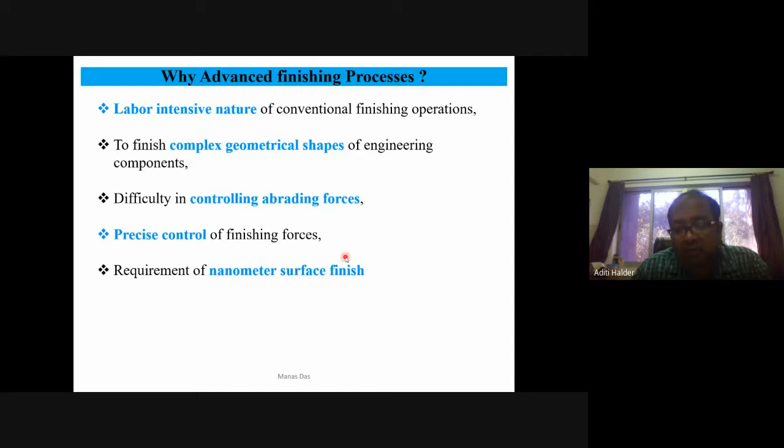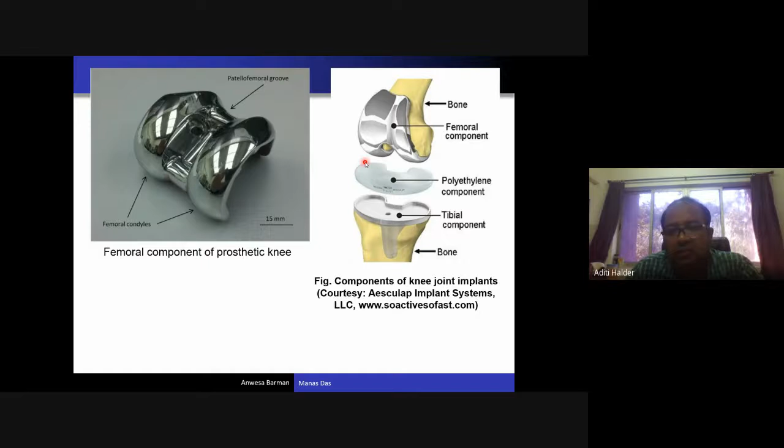This viscoelastic polymeric media is mixed with these abrasive particles. Extrude Hone is the company in USA who manufactures this viscoelastic polymeric media. The beauty of this media is that if you hold it in your hand, immediately it takes the shape of your hand. This means this media can make a compliant lap of the surface where you need the polishing.

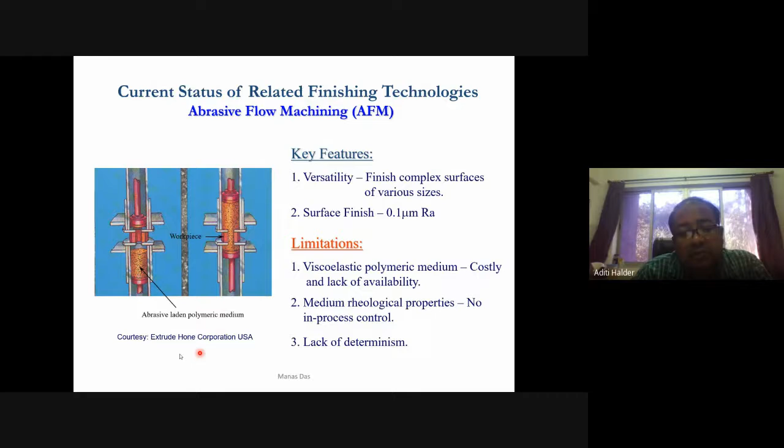Another process is called magnetorheological finishing, developed by the Center for Optics Manufacturing in Rochester, USA. They developed this magnetorheological finishing process and have been working on it for 20-30 years.

Now commercial machines are available, from a company called QED Technologies, to which they transferred their technology. They have different machines available, mostly used for polishing lenses and mirrors - high precision lenses and mirrors made of glass, quartz, and other brittle materials.

So this is the only process. Magnetorheological finishing is the only process for finishing this kind of brittle material.

Our defense industries, such as DRDO, are also trying to purchase this magnetorheological finishing experimental setup from them. But since it is used for defense purposes, like lenses used in missiles, they are not selling to us. So not a single machine is available in India.

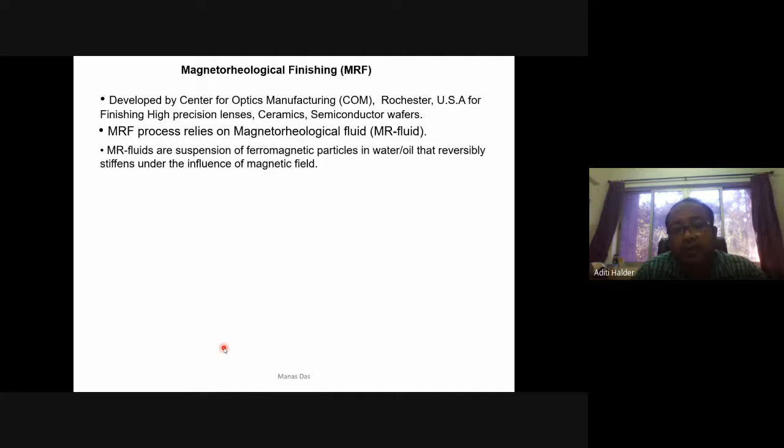It works on the basis of a magnetorheological polishing fluid. This MR fluid contains ferromagnetic particles, called carbonyl iron particles. It consists of these kinds of ferromagnetic particles, called carbonyl iron particles.

To make this a polishing media, you mix in abrasive particles - these may be silicon carbide, boron carbide, or diamond, depending on what kind of material you are using. So you can choose your abrasive particles depending on the hardness of the workpiece material - higher hardness requires harder abrasive particles. Alumina and silicon carbide are the lowest, then boron carbide, and diamond abrasive is the highest available ceramic abrasive particle.

These ferromagnetic iron particles are actually 99.99% pure soft iron particles. These iron particles do not take part in the material removal - only the abrasive particles mixed with these iron particles take part in the material removal.

Now for preparing this MR polishing fluid, there should be a base media - meaning you have to mix these abrasive particles and iron particles into a base media. When polishing lenses and mirrors made of glass and quartz, you can use a water-based media.

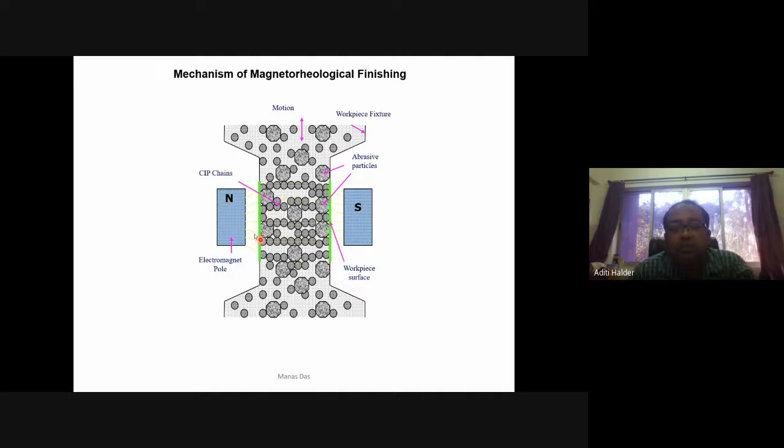So in this zone, the fluid behaves like a Newtonian or non-Newtonian fluid. When it exits the finishing zone, it behaves like a Newtonian fluid. So in this zone and in this zone it behaves like a Newtonian fluid, and in this zone it behaves like a non-Newtonian fluid.

Is there any questions? Okay. So he's...

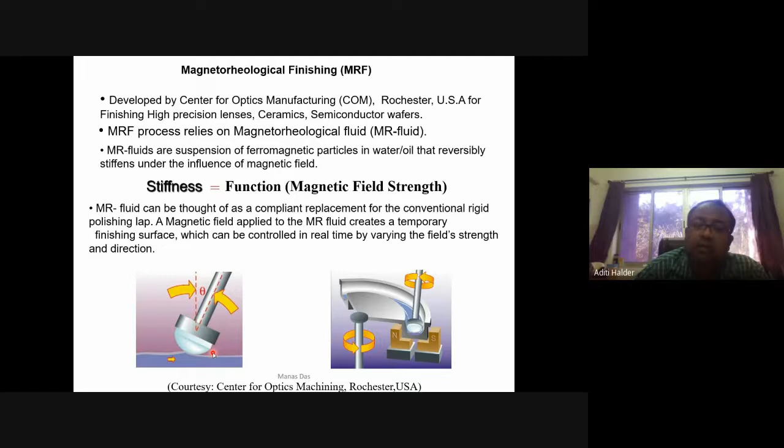So there is another design, and that is actually the final design. It consists of a disc. You can see this one - there is a part of a sphere. The top surface of this disc is a part of a sphere here.

From there it comes to the MR fluid conditioner. In this conditioner, the viscosity, yield stress, and temperature of the fluid are maintained. If it changes, the constituents in the fluid are immediately replenished, and the fluid maintains the same viscosity and yield stress, so that we get the same fluid for polishing of a single workpiece.

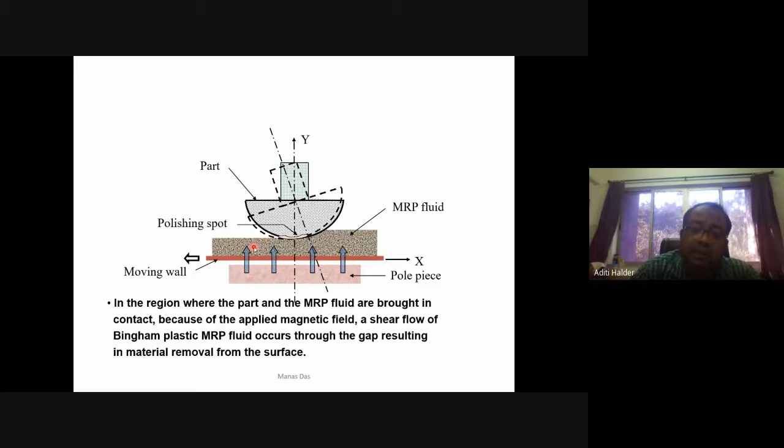So actually there is a shearing action of this MR polishing fluid over the surface of the workpiece. The magnetic field, you can see here, is perpendicular to the fluid, and the MR fluid is moving from right to left direction.

Now, this magnetorheological finishing process is the main process for polishing glasses and lenses, and it is mostly used in defense industries. But it is limited to flat, convex, and concave surfaces, and only for external surfaces. For polishing internal surfaces or complex freeform surfaces, it is very difficult. Although in this process you can get angstrom level surface finish, which is very rare in other processes.

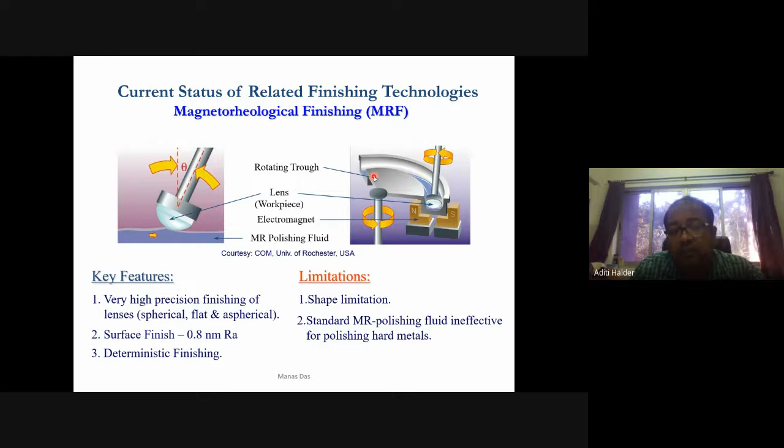So here they are using smart polishing fluid, smart polishing media, which can be utilized in the AFM process. In abrasive flow finishing, the problem is that the rheological property of the media cannot be changed externally, but the rheological property of this MR polishing media can be changed externally. So we can use this MR polishing fluid in the AFM setup and develop a new process called magnetorheological abrasive flow finishing process, or MRAFF. It uses MR polishing fluid in an abrasive flow finishing experimental setup, so it's a combination of the MRF process and the AFM process.

So this is the experimental setup of the MRAFF process. But before that, one prototype machine we have developed.

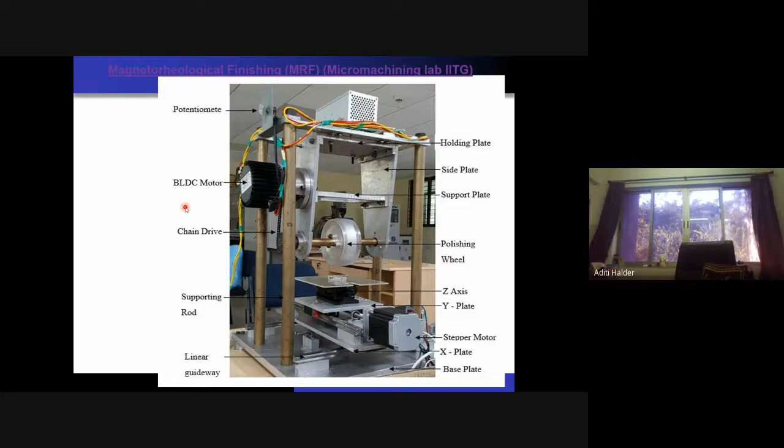So one prototype setup we have developed in our lab. Here, two stepper motors are used for the XY movement of this table, and one manual lab jack is used for the Z-axis movement. This is the workpiece fixture where we fix flat workpieces, and this is the MR polishing tool basically. The disc I showed earlier, we tried to make here using Perspex material. Here, instead of an electromagnet, we are using a permanent magnet, because the electromagnet needed to generate 0.5 Tesla magnetic field, with the coil, becomes very heavy, since we could not find a very good core material.

Now we know what they use actually: pure iron, meaning very low percentage of carbon, for this kind of high permeability core material. But at that time we could not find that, so that's why we used a permanent magnet here. The permanent magnet serves a similar purpose, but here we cannot change the magnetic field. So what we did was use NdFeB, neodymium iron boron.

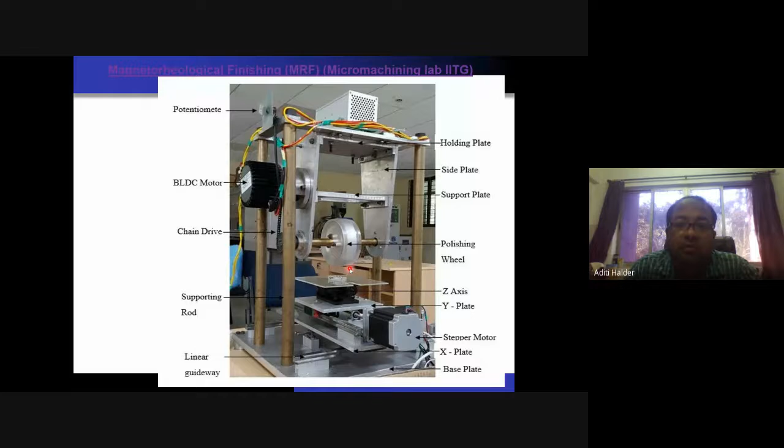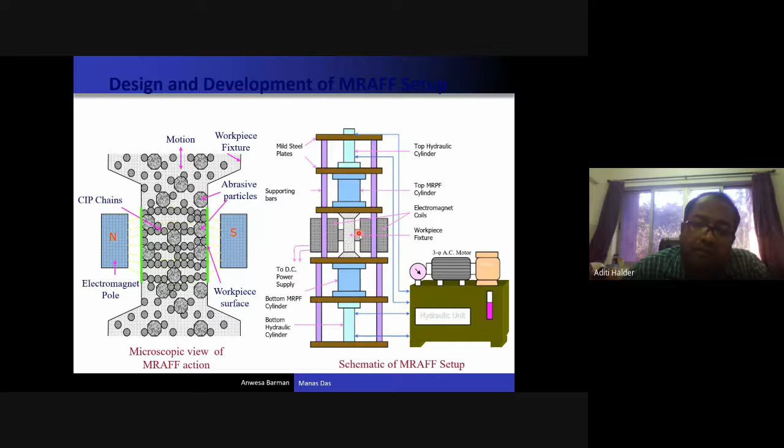So like that we can develop this kind of custom made setup. We have also developed this experimental setup, this custom made experimental setup, in our lab.

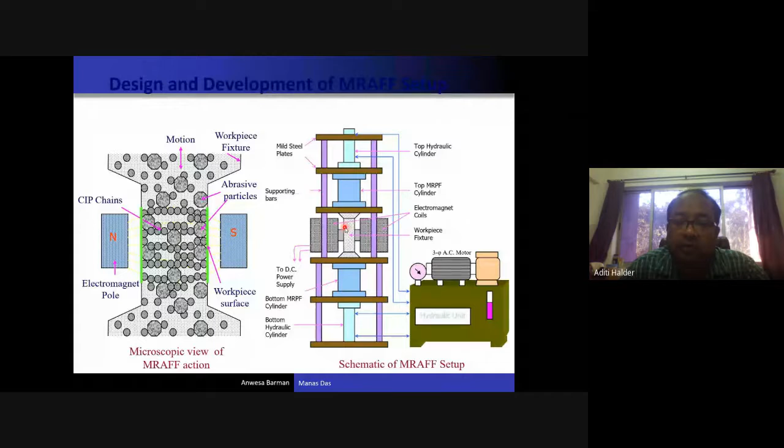With material and everything, I gave 1 lakh rupees for this setup. I shall show later that our experimental setup, how we have developed it. Okay, so this is the setup.

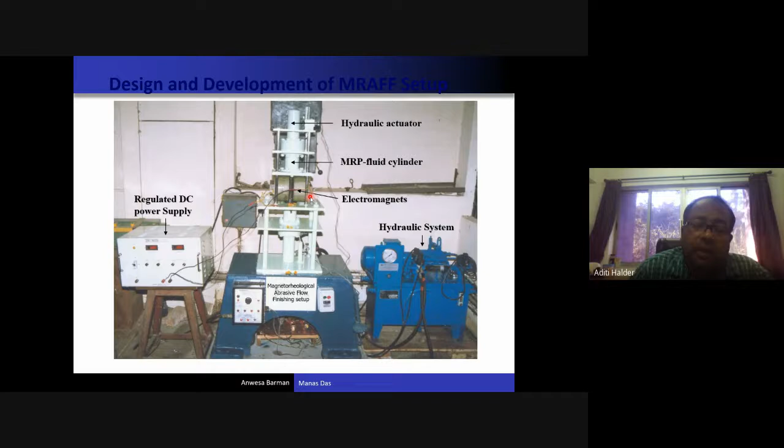So later we found that low carbon steel, any kind of low carbon steel, will perform best for this kind of setup.

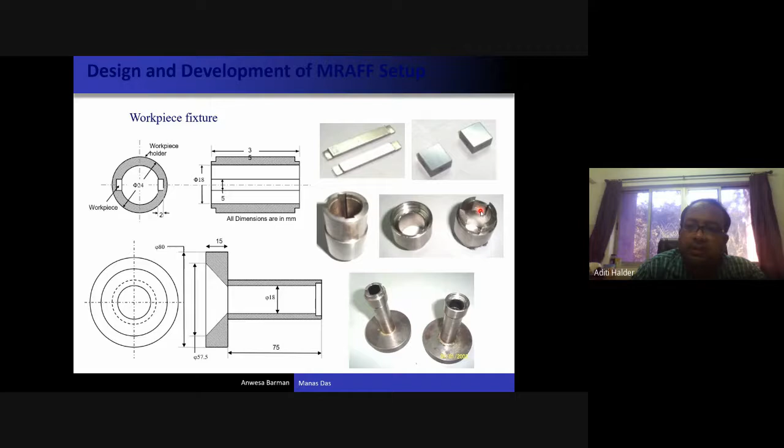Sorry for the interruption, just 2 minutes from there.

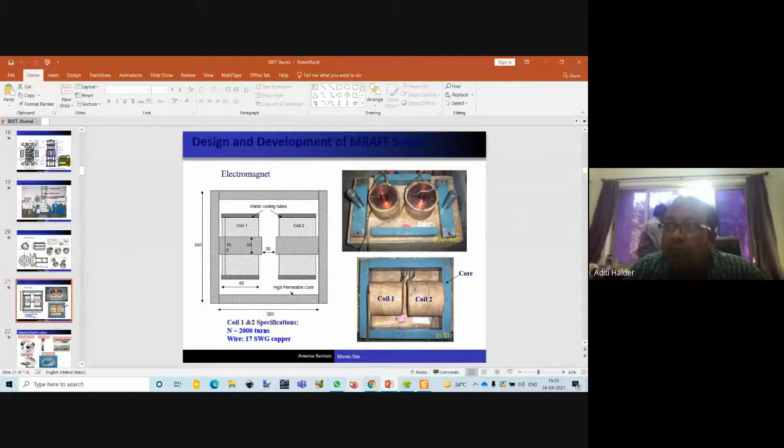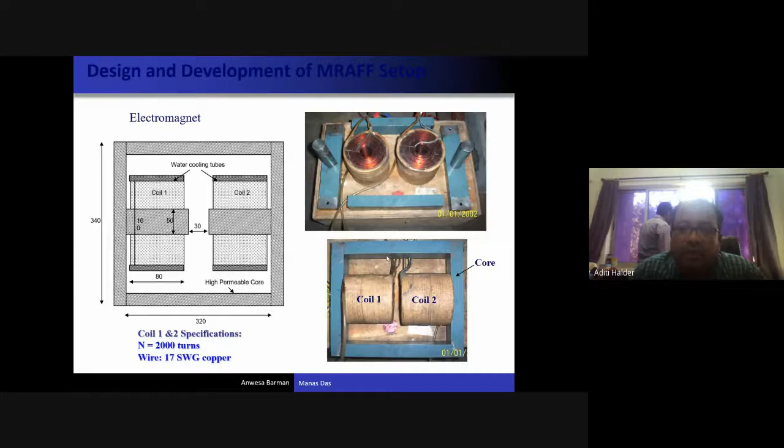Yes sir, actually this is the electromagnet what we are using here. There is a core material, and this is the coil. It is called an S-type electromagnet. So instead of using this cold roll anneal steel, you can use low carbon steel.

And this coil, you can see outside there is a cooling channel, which is a copper channel. Chilled water is flowing over the copper coil so that whatever heat is generated can be removed. So this electromagnet you can use for 1 to 1.5 hours, so it can work perfectly without any damage to the insulation of the copper wire.

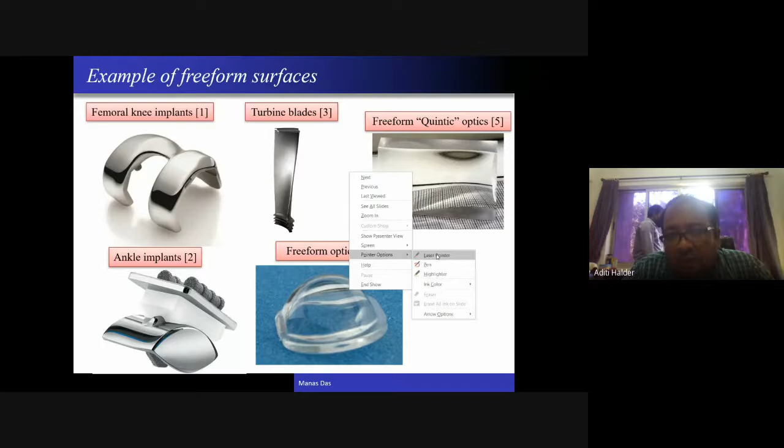Now these are the different components which can be polished by this MRAFF process. First one is femoral knee implant, second one is turbine blades, and third one is the freeform optics. Now ankle implants, freeform optics - these are the different components which can be polished by magnetorheological finishing very, very efficiently.

So we are doing here in our lab - this femoral knee implant actually already polished. Some miniature gears already we have polished. Turbine blades we did not try, and some other components, space related components, we have tried here in our lab.

So this MR fluid, if you want to generate indigenously, there are three phases. One is the continuous phase, which is the base material, second is the magnetic disperse phase, and third one is the abrasive particles.

This continuous phase, as already I have told, consists of water based or oil based media. Now this base media is mixed with these ferromagnetic iron particles, which are in the micron size. Its size depends on your actual requirement. If you need higher magnetic field, you have to use bigger size iron particles.

So these iron particles, mostly we are using carbonyl iron particles, Fe(CO)5. These carbonyl iron particles are supplied to us by BASF. BASF is a company in Germany, a very famous chemical company. They prepare these carbonyl iron particles and gave them to us free of cost.

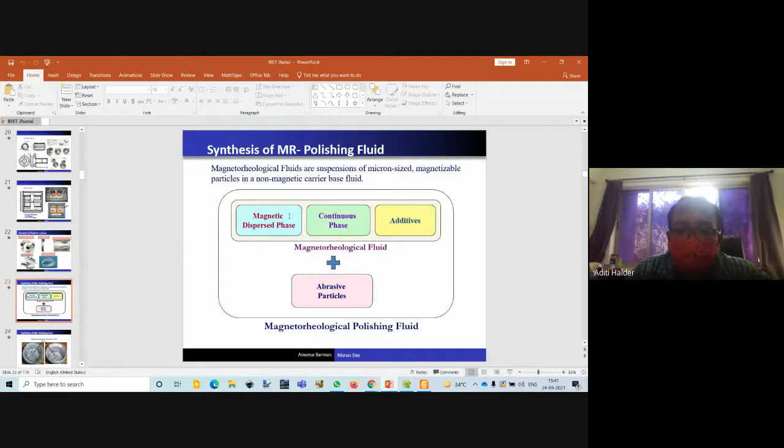So that's why some kinds of additives are actually used. These additives are like oleic acid or glycerol. These additives are called surfactants. When you mix these surfactants along with the base media, they make a small layer over the surface of these magnetic particles. Because of this small layer generated over the entire surface of the iron particles, these magnetic particles cannot come close together, so you can reduce or avoid the agglomeration problem.

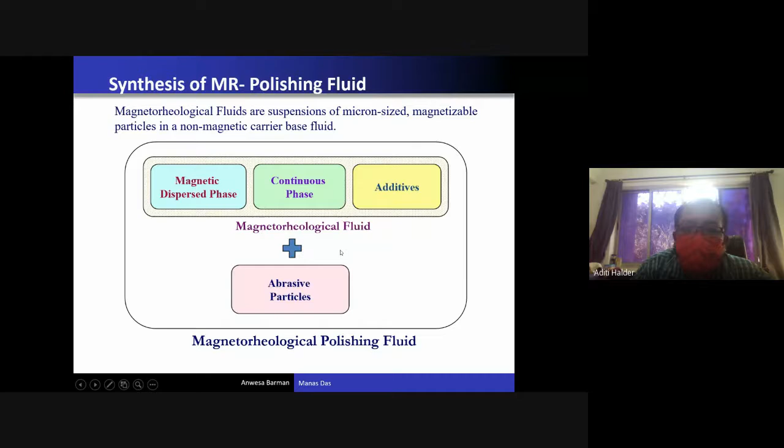But if you use more volume percent of these additives, because of this bigger layer or higher thickness of surfactants, the magnetic field will be reduced, so they will be less magnetized. Now, after mixing all these things, if you mix these abrasive particles, this MR fluid will become magnetorheological polishing fluid.

So now coming to this media, you can see this kind of thick media which is generated when you are using MR polishing fluid. Now, other than these carbonyl iron particles, other options of ferromagnetic particles are manganese zinc ferrite and nickel zinc ferrite. So these are the other options.

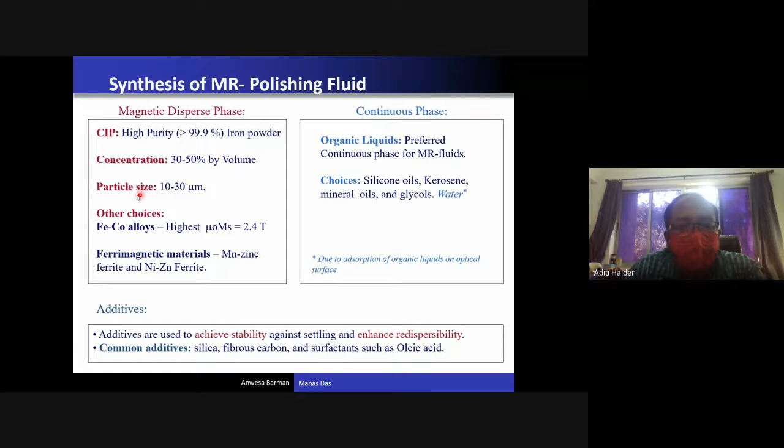So this CIP has a unique property. It is 99.9% pure, and mostly it is 30 to 50% by volume used inside MR polishing media, and their size is 10 to 30 micron in range. Okay, and then they have, you can see here, hysteresis loop.

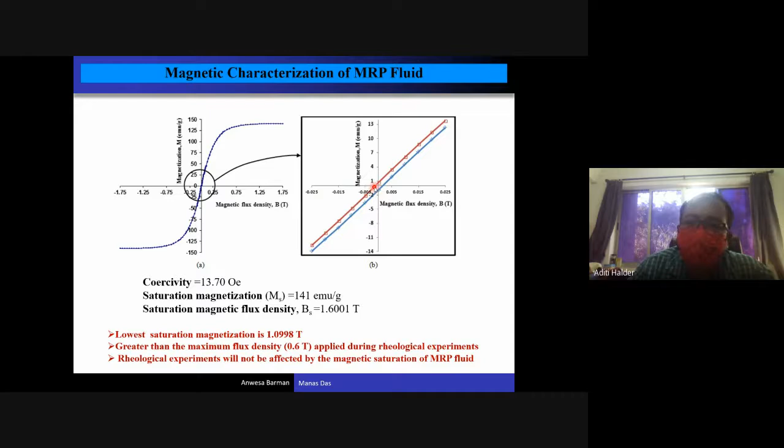So in case of this MR fluid, what you have to do: around 2 to 4 to 5 ml of this MR fluid you have to keep inside a small plastic chamber, and then you have to magnetize it. And then you can see this remnant magnetization is less. This means when remnant magnetization is less, if you demagnetize, then immediately these iron particles also demagnetize, so less amount of magnetization will be there, and agglomeration can be avoided.

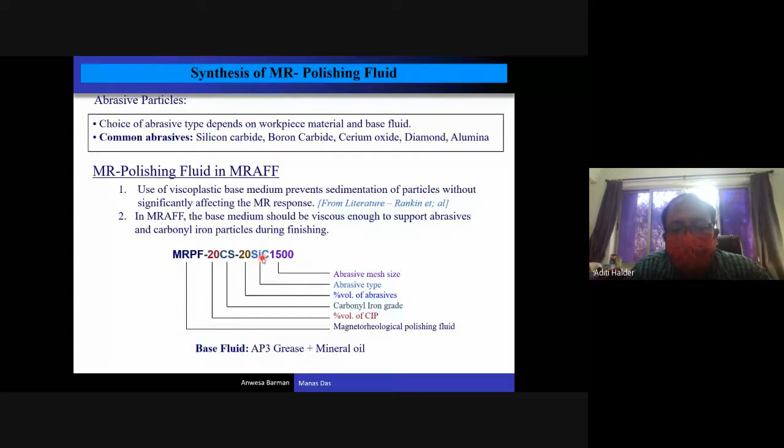So this normal MR fluid, this magnetorheological polishing fluid, is 20% by volume of CS grade CIP iron particles, and 20% by volume silicon carbide abrasive particles of 1500 mesh size. So this kind of nomenclature we have used. This one we shall discuss later.

Now this MR fluid, we have to consider rheological properties, because if you consider a Newtonian fluid, the shear stress and shear rate plot will be a straight line starting from the origin of the curve. For non-Newtonian fluid, there is a yield stress. So non-Newtonian fluid like MR fluid has a yield stress and a plastic viscosity; this means it does not start from the origin.

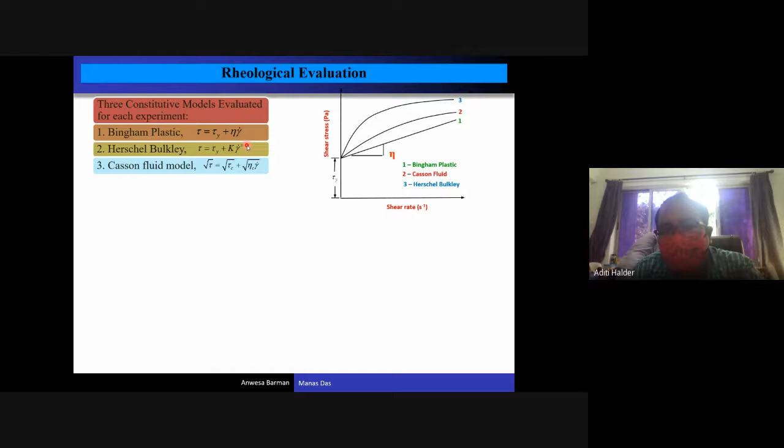Now another fluid which can also represent this MR fluid is called the Herschel-Bulkley fluid: tau equal to tau y, the yield stress, plus consistency index K times shear rate to the power n, the power law index. So this n value, if it is 1, then it becomes Bingham plastic. If n value is greater than 1, it is shear thickening. If n value is less than 1, it becomes shear thinning fluid. So these are the three different fluids.

So now for measuring the yield stress and viscosity, there is a capillary rheometer. Through this capillary, the MR fluid is forced to flow. This capillary diameter is around 2 millimeter diameter.

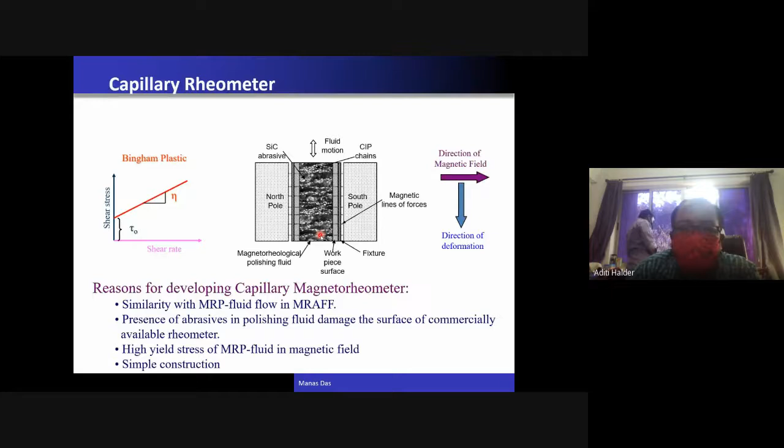The L by D ratio, where L is the length of the capillary and D is the diameter, should be more than 40.

The tau y is the actual yield stress. So yield stress and plastic viscosity, which are unknown, can be measured from the capillary rheometer experiment. At different pressures we have to measure the volumetric flow rate, and from there, if you plot it, you can get the values of tau y and eta PL.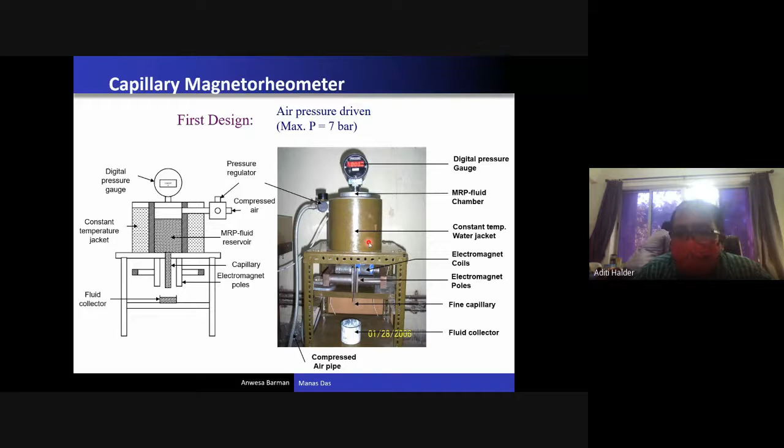So what we did initially: this is the capillary rheometer here, and this is the core material of the electromagnet. Through compressed air, the MR fluid was made to flow, but it did not work.

Then what we did was use the MR polishing media or MRAFF experimental setup itself for this capillary rheometer. This is the top media cylinder which is filled with MR fluid. At the bottom there is a capillary attached, and through the electromagnet, magnetic field is applied, and the piston forces the media to flow through this capillary.

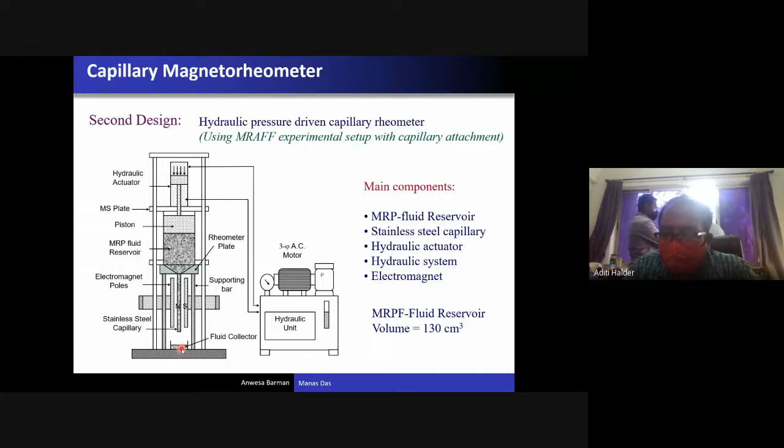At the bottom we placed a container, which collects the MR fluid once steady state is reached. This container collects the MR fluid when the steady state is reached, and from there we can calculate the volumetric flow rate.

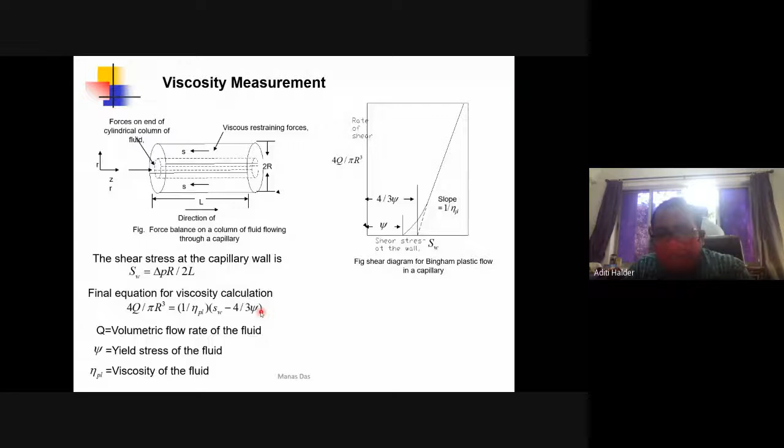Putting all these values into the equation, you can calculate the values of the plastic viscosity and the yield stress, shown over there in this graph.

Later, we got one more rheometer, the Anton Paar MCR 301 rheometer. It has an MRD device, a magnetorheological device. In this rheometer you can see there is a tool master attached to it.

In the bottom plate there are two plates. The top plate is the tool master, and the bottom plate is the MRD device, which is a sandblasted measuring plate. This is called a parallel plate rheometer, with the top plate and bottom plate.

In between these two plates, MR fluid is kept. This has a 20 millimeter diameter and 1 millimeter thickness. This is the MRD device, magnetorheological device, where the electromagnet is located.

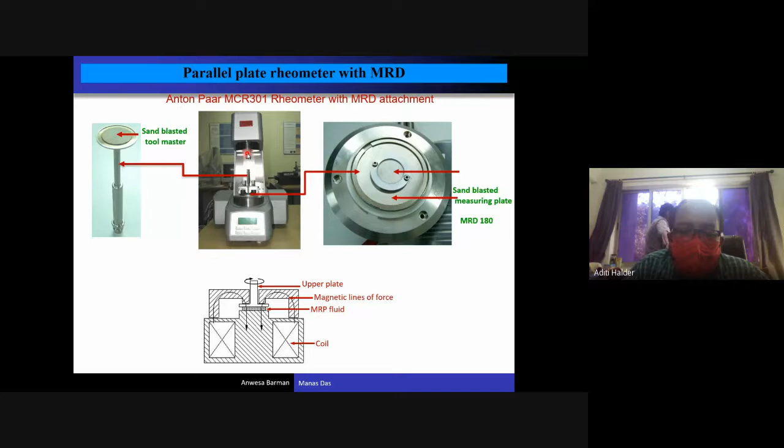Using this MRD device, magnetic field is applied perpendicular to the MR fluid. The tool master, which is attached here, rotates at a certain RPM, and this RPM is proportional to the shear rate.

When you apply magnetic field, there is a resisting torque that can be measured by the tool master itself, and this resisting torque is proportional to the shear stress.

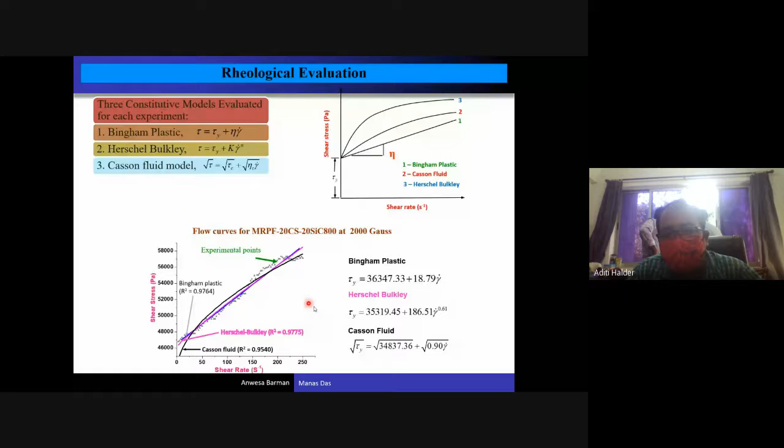If you plot the shear stress and shear rate values at different shear rates, you get different points, which you can fit using different curves. There are three different curves we used: Bingham plastic, Herschel-Bulkley, and Casson. Using these three equations, we calculated the yield stress and viscosity of this fluid. So this is how you can measure it.

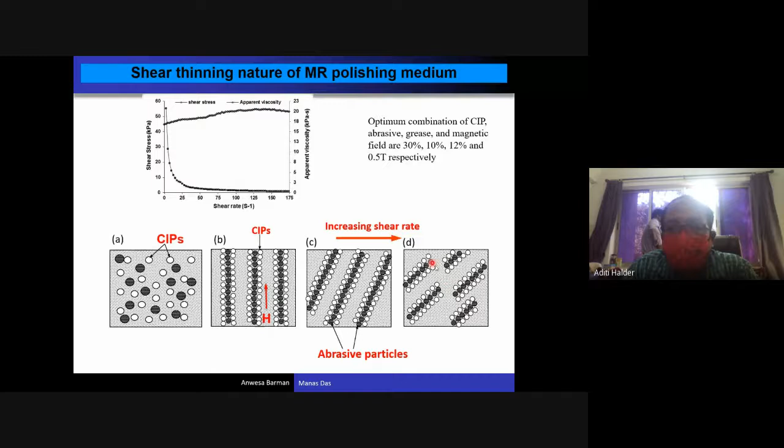Now when you apply a certain amount of shear rate, this chain structure actually breaks. When you use a higher shear rate, the chains initially bend, but after that they break and do not get time to realign again. So permanently there is chain structure breakage, and only then will the MR fluid flow. That's why this MR fluid is called a shear thinning fluid.

We can do lots of experiments with this MRAFF process. The external parameters you can change from outside are the extrusion pressure from the hydraulic unit, finishing cycle, and magnetic field. The same MR fluid can be used for polishing different kinds of workpieces - you don't need to change the MR fluid. What you do is change the magnetic field only.

By changing the magnetic field - by changing the current to the electromagnet - more magnetic field can be generated over there. So these are the different parameters for the fluid: abrasive concentration, abrasive mesh size, CIP concentration, and volume concentration. These are the different parameters you can vary.

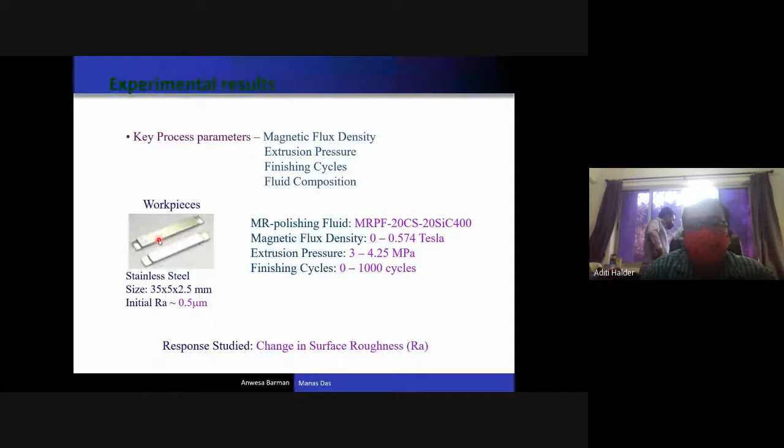Now experiments can be conducted on this kind of stainless steel workpieces. At different magnetic fields we have done the experiment. This is the initial surface roughness of the workpiece, and this is the final surface roughness at different magnetic fields. At zero magnetic field there is no finishing, because the CIP particles of the MR fluid cannot take part in metal removal.

I shall show here that when you apply zero magnetic field, these abrasive particles are not bonded by the iron particles. So whenever these abrasive particles come in front of a roughness peak, they rotate over the roughness peaks without cutting.

Now at higher magnetic field, these CIP particles are bonded together, so abrasive particles are held in between this strong bonding force of the CIP particles. Whenever they come in front of the roughness peaks, they remove the surface peaks from the workpiece surface, and small amounts of chips are generated.

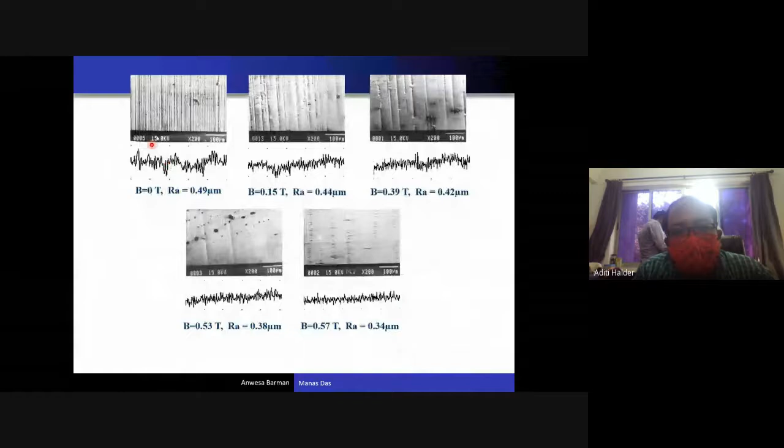With increasing magnetic field, the change in surface roughness also increases. Initially this is the grinded workpiece, and these lines are actually peak lines or valleys. Initially the distance between two valleys is more, and this distance increases further in case of a higher magnetic field.

We have also done experiments with extrusion pressure. One thing I want to mention here is that in this MR fluid there are two zones: one is the plug flow region and another is the shear flow region, or yielded region. In both regions - in the plug flow region, this MR fluid does not yield.

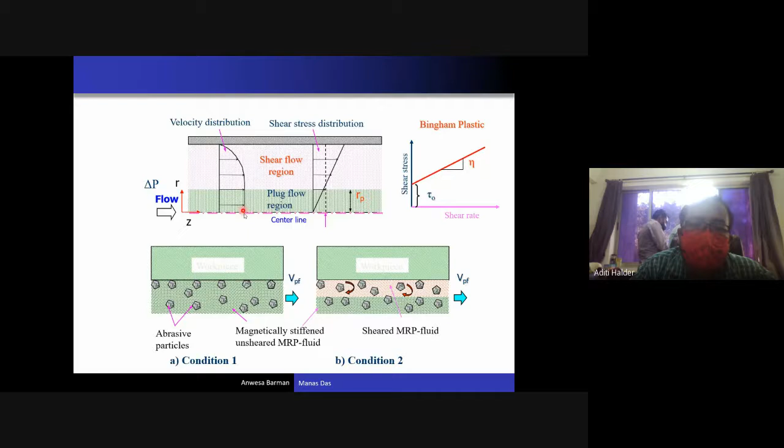In the shear flow region, the chain structure of the MR fluid actually breaks. If you see a normal Newtonian fluid, the flow profile is parabolic. But when using this kind of non-Newtonian fluid, there are two zones. In the plug flow region, the velocity gradient with respect to the radial direction, del Vz del R, is zero here. In this case, the fluid chain structure does not break, as the shear stress is maximum at the wall and minimum at the center line.

As the shear stress is maximum at the wall and minimum at the center line, the chain structure breaks at the wall itself. That's why this kind of profile is generated when simulating this MR polishing fluid. Now, with finishing cycle also, a number of experiments are done.

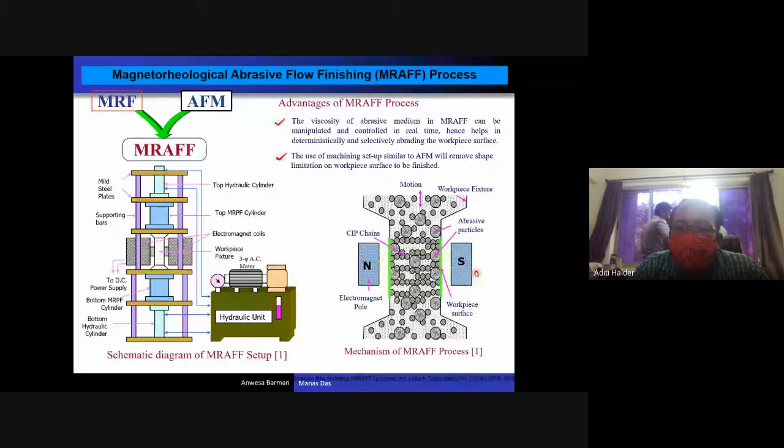After that, we found that in front of the two poles where the magnetic field is maximum, if you are polishing the cylinder, the surface finish is more. But at the zone perpendicular to that, where the magnetic field is lesser, you will see non-uniform finishing over the surface of the workpiece. So we thought, if we can rotate this magnetic field around the cylinder, there may be chances of getting better finishing.

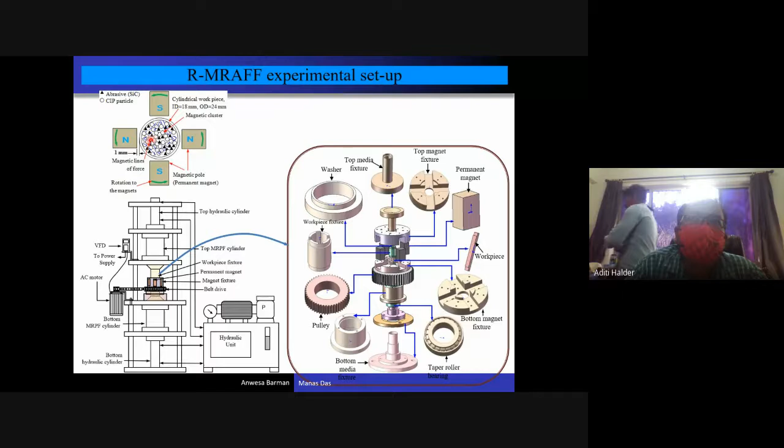So that's why we did this. This is the cylinder where we want to polish the internal surface. Now these permanent magnets are kept in a magnet fixture, attached there. This magnet fixture is rotated at a certain RPM. If it rotates, the MR particles inside the cylinder also rotate, and as the abrasive particles are mixed, it removes the surface undulations on the workpiece surface.

It is rotated by an AC motor, as you can see here. This is the exploded view of the finishing zone, workpiece fixture, and magnet fixture. Many components are here: these NdFeB permanent magnets which are attached, this is the workpiece, cylindrical workpiece. The magnet fixture is attached to a pulley, placed over it, and this pulley is rotated using a belt drive. So using the AC motor and this belt drive, the total fixture is rotated.

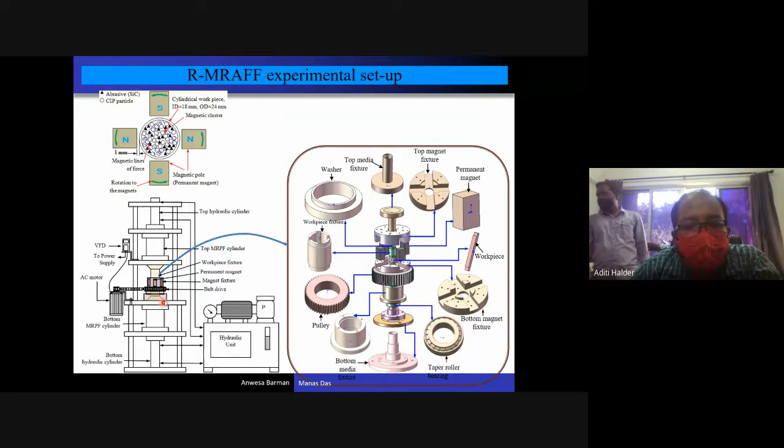There is a variable frequency drive, using which I can change the RPM of this magnet. Using this hydraulic unit, we can give a reciprocating motion to this media, and using the circular motion of this fixture, we can also rotate this media. So we can give two types of motion: reciprocating motion and also circulating motion. That's how it works.

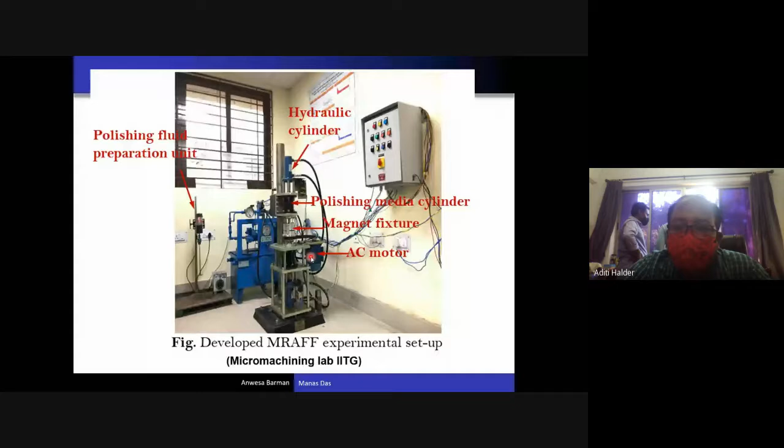This is the experimental setup we have developed in our lab, where we have tried to automate the total process. You can see the AC motor here, the magnet fixture here, the belt drive here, and the hydraulic unit over here. This is the control unit of the hydraulic unit, controller of the hydraulic unit, and this is the stirrer.

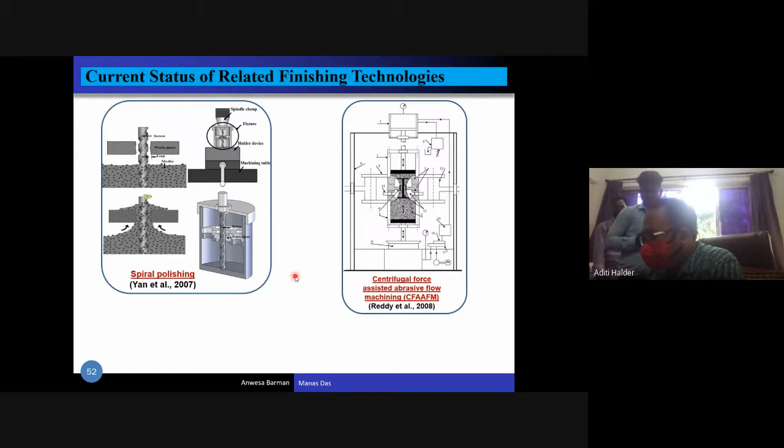Using this, we mix our MR polishing fluid over here.

Okay, sorry for the interruption. No problem, sir.

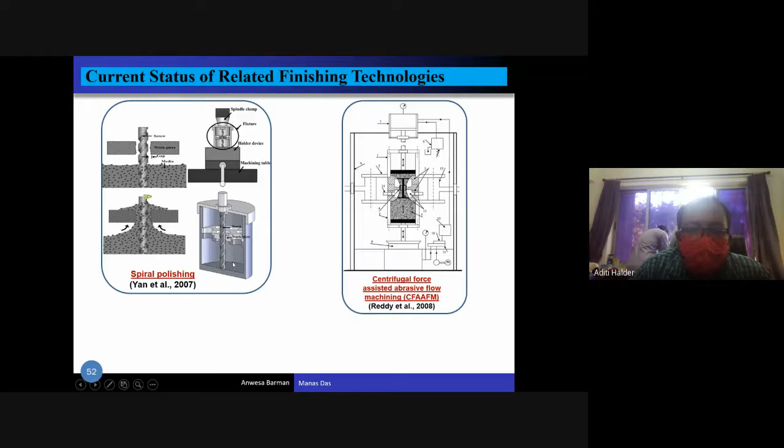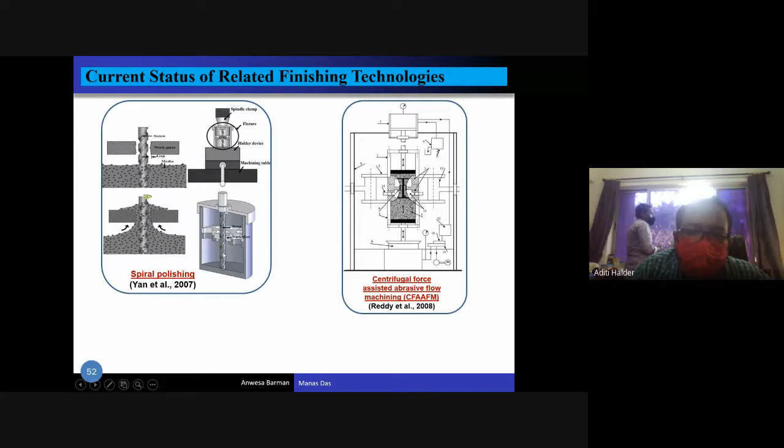Other than this complicated process, you can use a drill bit in a drilling machine. You can make this kind of chamber, and from the bottom chamber you can fill up polymeric media or MR fluid, and then rotate this drill bit, a twist drill. When you move the media from here to here, you rotate clockwise, and when moving it from top to bottom, you rotate anti-clockwise. So you have to design the drill bit rotation so that sometimes it rotates clockwise and sometimes anti-clockwise.

While moving this media, in between the drill bit and the workpiece as it passes, the abrasive particles will remove the surface undulations. Other than this, there is also a centrifugal rod setup, developed at IIT Roorkee, where a centrifugal rod is rotated inside the workpiece fixture. Because of this rod's rotation, the MR fluid and AFM media also rotate, removing the surface undulations. Another setup is there, developed at IIT Madras.

This is the workpiece holder. On this workpiece holder, different small flat workpieces are fixed. It is filled with MR fluid, and there is a spring loaded shaft there.

Using the spring loaded shaft, what they do is this MR fluid is moving top and bottom, and outside they have applied this magnetic field, and also this workpiece shaft rotates inside this fluid.

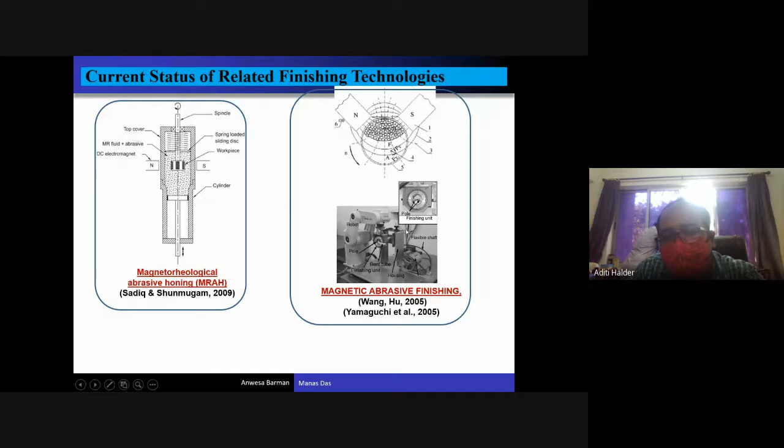Now another setup is there. There is a robotic arm which moves over the bent tube, so any kind of bent tube can be polished. Here they are using the magnetic abrasive finishing process.

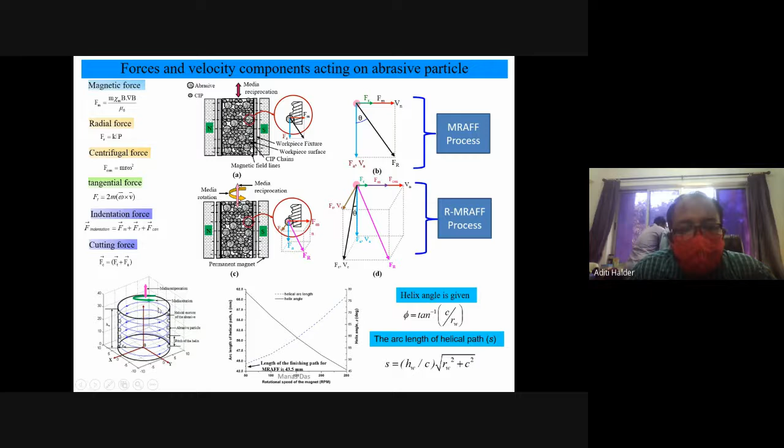Because of this rotational speed of the MR fluid, a centrifugal force will be added. Besides the magnetic force and radial force, one centrifugal force and also one Coriolis force will be added. So this magnetic force, radial force, and centrifugal force will help in indenting the abrasive particles into the workpiece surface. Now, this axial force and Coriolis force help in actually removing surface undulations from the workpiece surface.

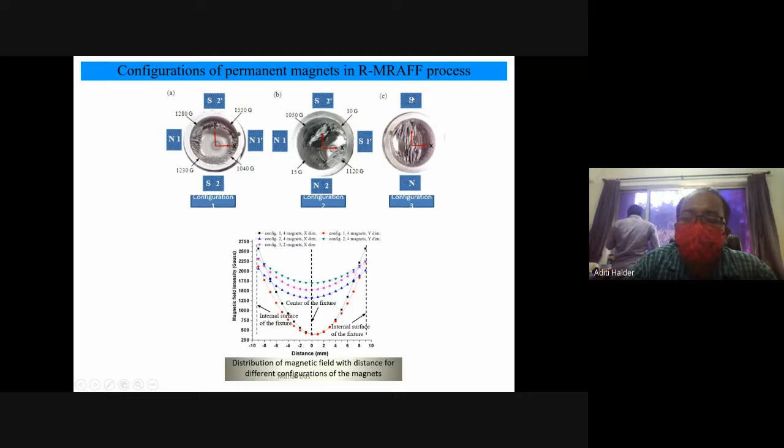But in this case, you can see here north-south, so the entire MR fluid is surrounded inside the workpiece fixture. Now only two magnets are used, north and south. So this CIP chain, you can see here, is passing through the center of the cylinder also. Using this, we obtained very good surface finish.

Now after that, we did finishing of flat workpieces after rotation as well as reciprocation. So three different workpieces we have taken: brass, stainless steel, and EN8. Brass is a soft material, and we got very good surface finish for brass.

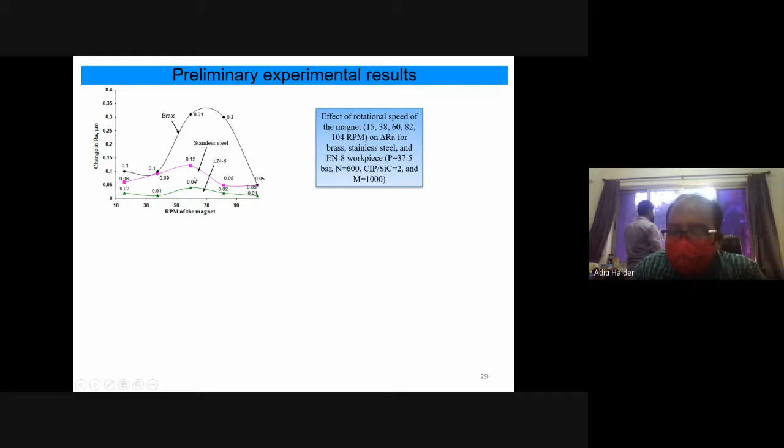After that, stainless steel. But for EN8, as it is a magnetic material, we found that when using the EN8 workpiece, at the internal surface of the workpiece, with the permanent magnet outside, this EN8 workpiece also gets magnetized. As it is magnetized, MR fluid also sticks to the surface of this EN8 workpiece.

So for finishing to take place, there needs to be relative movement of the media with the workpiece. Here, as the MR fluid is constantly touching the workpiece surface, there is no relative movement. So we achieved a lesser surface finish for this kind of EN8 workpiece.

Now we can see here for the stainless steel workpiece. This is the pre-grinded workpiece of stainless steel. This is the grinding marks which are still there. In between these valleys, there is a flat portion which is polished. Now this kind of mark is actually the MRAFF lay.

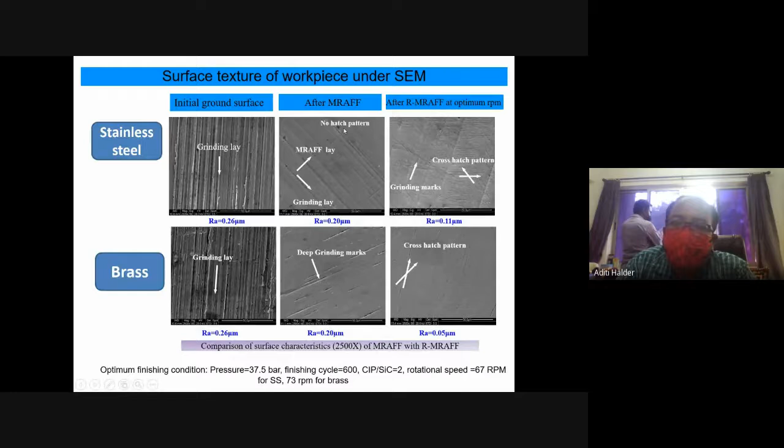Now when we go for the R-MRAFF process, this kind of cross hatch pattern is actually generated. For the brass workpiece also, you can see this kind of cross hatch pattern which is generated. So this cross hatch pattern helps in oil retention in case of actually...

It helps in oil retention in case of polishing a cylinder. In case of polishing a cylinder, it helps in oil retention and reduction of friction. So these are the cross hatch patterns, and we found around 50 nanometer surface finish on the workpiece surface. From 240 nanometer, we got actually 50 nanometer on the brass workpiece.

So these are the actual SEM images showing grinding marks here. This is the MRAFF process, and this is the R-MRAFF cross hatch pattern. With higher RPM, at 67 RPM, we got a very good surface finish here.

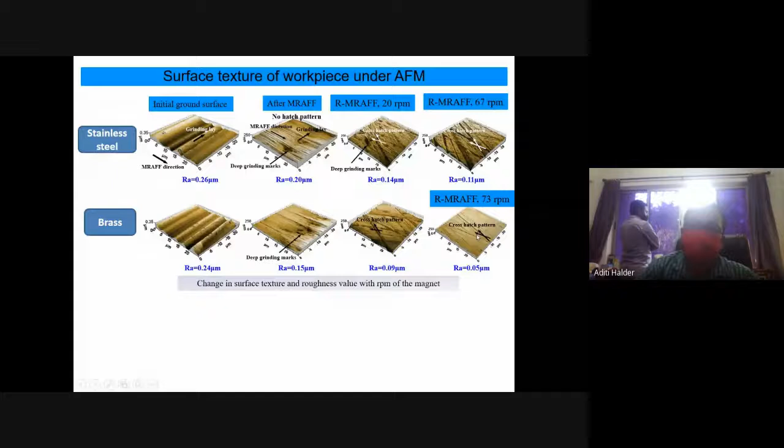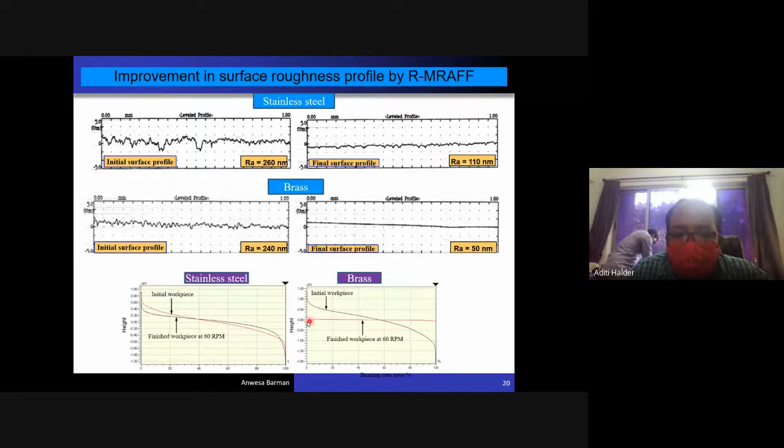So this is the bearing area curve. The initial bearing area curve is when two surfaces are meeting together with high relative movement, so in that case the bearing area curve is very important. The initial bearing area curve has a higher slope, but the final bearing area curve, you can see, has an almost reduced slope. Now it has become almost flat here.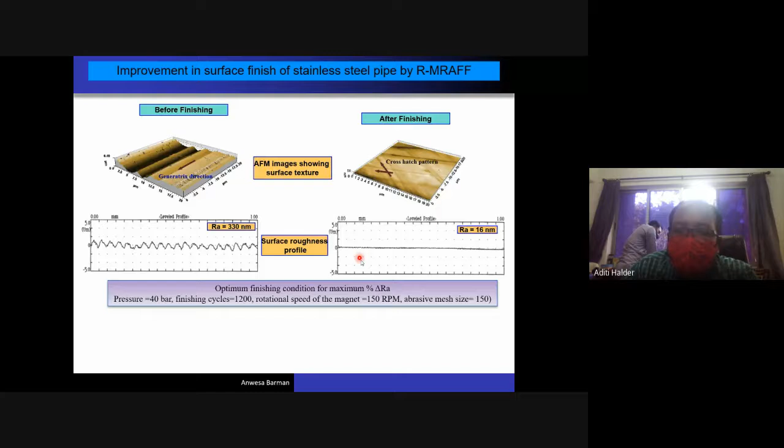So some of the results we are showing here. This is the atomic force microscope image. This sinusoidal, almost sinusoidal profile is generated because of the internal surface of the cylinder, made by a boring operation in a lathe machine. So these are basically generatrix marks. Around 330 nanometer surface finish is generated, and after finishing you can see an almost flat surface, around 16 nanometer, with this kind of cross hatch pattern also generated.

Out of roundness is also very important. You can see when it is touching the internal surface of this cylinder, although to the naked eye it appears almost circular, it is not. You can see undulations at the internal surface. This is the circumscribed circle and this is the inscribed circle. The distance between the circumscribed and inscribed circle is called out of roundness.

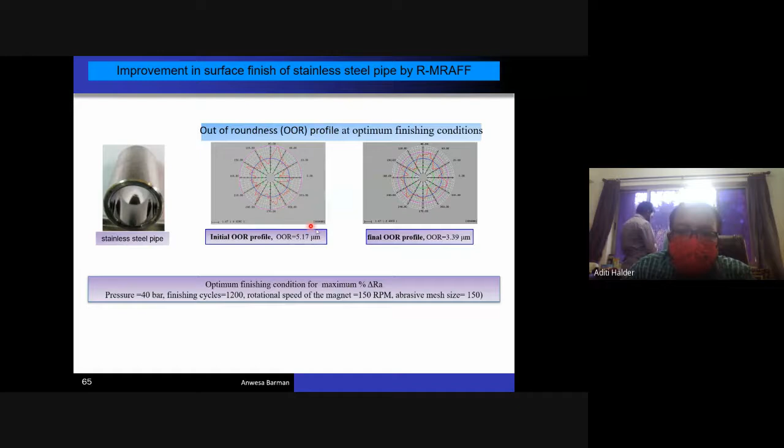So after doing the MRAFF process, R-MRAFF process, we found that out of roundness, which initially was 5.17, is reduced to 3.39 micron. Now we have designed our experimental setup for polishing of the femoral knee implant.

For that, initially we developed this kind of novel polishing tool. So this final design of the tool, I am going to show here now. This is the final design of this tool.

At the center, it is a cylindrical permanent magnet. We have used an NdFeB permanent magnet of 15 millimeter diameter, and outside there is mu metal. Many of you might have heard of mu metal; it is used in space industries for magnetic shielding. This means whatever magnetic field is losing at the end can be shielded if you put it inside mu metal. This mu metal will help avoid any loss of the magnetic field; it will concentrate it at this end.

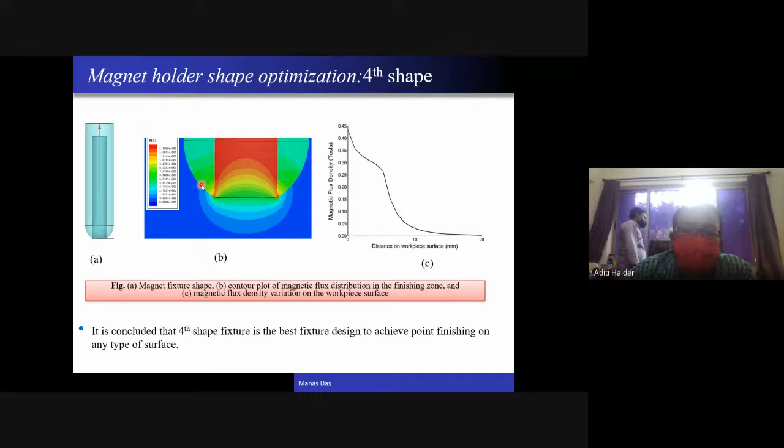If you make this kind of spherical shape at the end, and put this cylindrical permanent magnet inside, you can see this kind of contour plot of the magnetic field generated, which is almost spherical. We need this spherical shape of the magnetic field so that when we keep our MR fluid over there, it will take a spherical shape, and this portion will touch the workpiece surface, so we can get a small spot diameter. With this novel design, we have started our experiments.

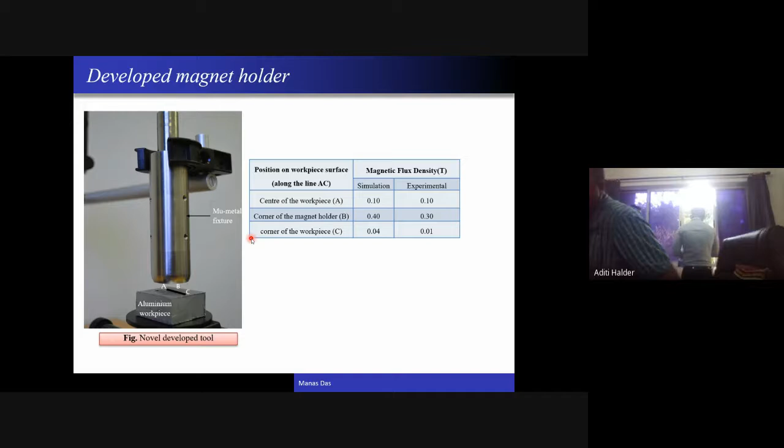So this is the tool. Now this tool is attached to a milling machine head. The CNC machine we are using here has XYZ three movements, and also this tool rotates, and there is another fourth axis, which I shall show later. It is attached to this fourth axis also.

Now, every time this tool should be perpendicular to the surface of this workpiece. Unless it is perpendicular to this workpiece, it will not give proper finishing or uniform finishing.

So that's why we are rotating. The RPM of this shaft is around 6 RPM. So it is rotating with a very small RPM, and it stops or dwells at certain time, and then it will do the polishing using this novel polishing tool.

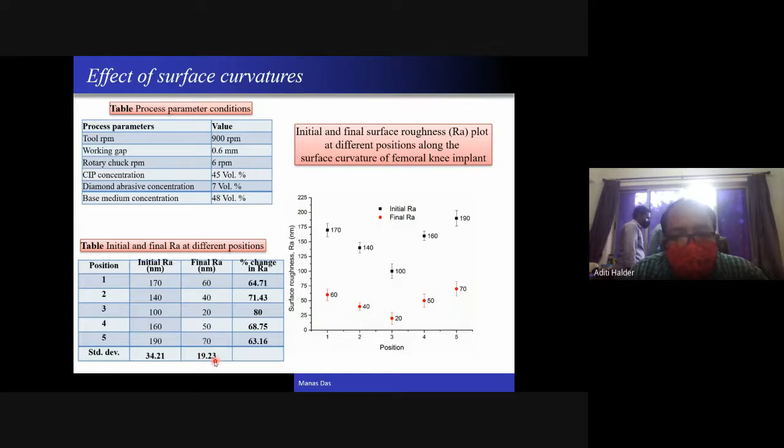So we found that the initial standard deviation of surface roughness was 34.21, and the final standard deviation was 19.23. So it is reduced here.

Now I shall show the final polished surface of the prosthetic implant here. So the area surface roughness, initially 210, we got it reduced to 42.21 nanometer.

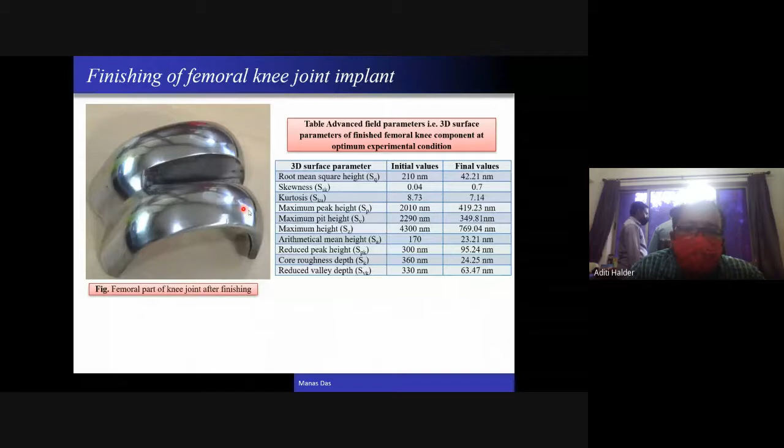Now making this knee implant is also very difficult, because it has so many complex surfaces. We can see here it is made using a 5-axis CNC machine. We have a collaboration with ISRO, so from ISRO we fabricated this one. It is made using a 5-axis CNC milling machine.

That plate is made of ultra high molecular weight polyethylene material, which we imported from the USA. So for pin on disc, this material is used, and this pin is polished by MRFF finishing, and another one is polished by hand finishing.

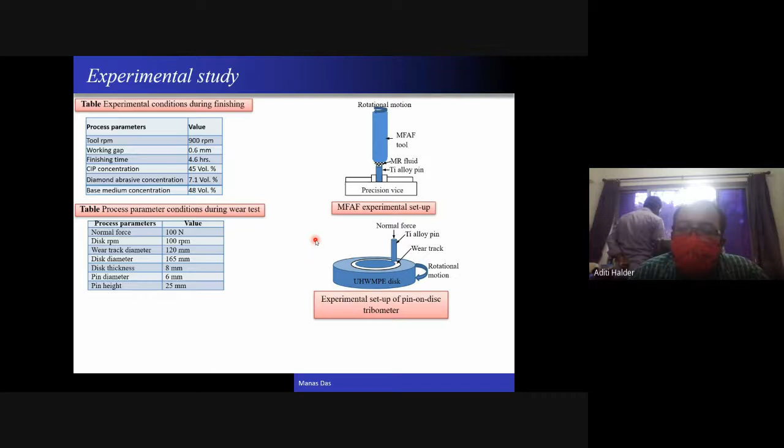So one is hand polished, and the other is MFAF polished. In both cases we have done this wear test. We found that the wear test result for the MFAF polished workpiece is less.

Now after that we did finishing of these gears. These are different small miniature gears which are made, one of brass, another of stainless steel. These are the fixtures we have made, and we have patented this. These miniature gears are made using wire EDM machine, with diameter around 18 millimeters.

This fixture is designed here. Now this workpiece fixture is placed over there, in the same setup as the MRAFF process. This miniature gear is placed inside it. These are the small holes you can see here, through which the MR fluid passes through the miniature gear and removes the surface undulations.

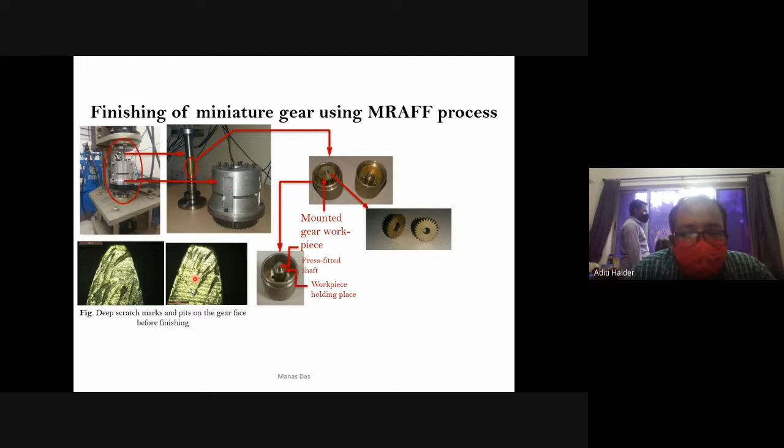So initially in these gears, you can see so many pits, burrs and scratch marks, which hinder proper smooth movement of the workpiece. Now you can see how the fluid moves, MR fluid moves from these holes, it moves inside, passes through the gear, then goes outside from this fixture. So different portions of the workpiece get polished here.

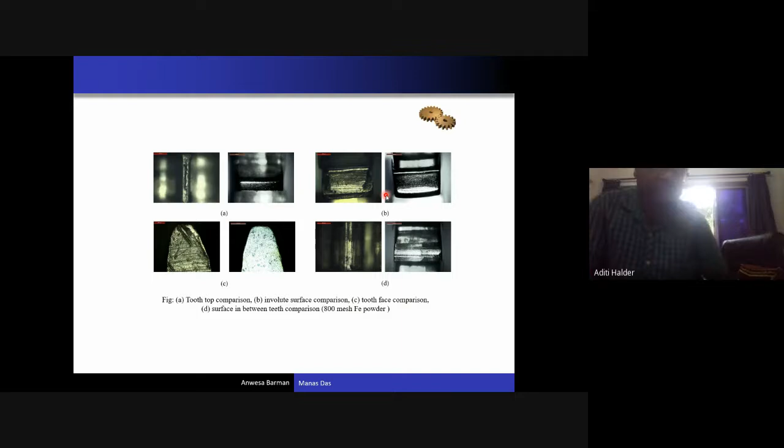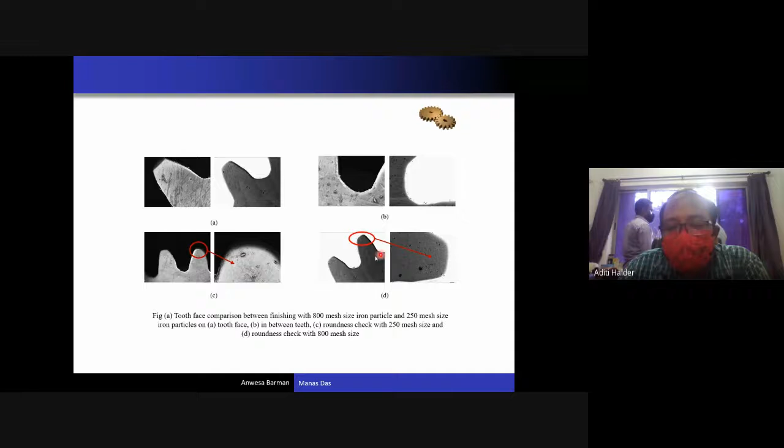Different faces, like this face, top profile and involute profile - different profiles are polished by this process. Here you can see these small burrs, which are also actually removed by the MRAFF process, not visible in the final workpiece. So this workpiece is polished by MR polishing media.

You can also develop a similar kind of setup. It is very easy to develop, or you can develop different types of setups. You can use your milling machine in your workshop, or a drilling machine, small drilling or milling machine. The only thing is you have to develop this MR polishing media, which is also very cheap - you don't need to purchase from BASF Germany. Another company in India manufactures electrolytic iron powder, and it is also very cheap.

Some of these things I have already shown. This experimental setup I have shown for polishing prosthetic implants. This setup also I have shown. This MRFF setup I have shown for prosthetic implants. This is the setup for MRF finishing. This setup also I have shown, and this is the micro ECM setup we are working on now.

Another micro EDM setup we have also developed in our lab. This is the plasma polishing setup. Here, this kind of HRG gyro - these gyros are used for location, for finding location and detecting change in case of satellites, for interplanetary satellites. This prism is also used in ISRO laser gyro. These gyroscopes are used for location and for change in direction of the satellite.

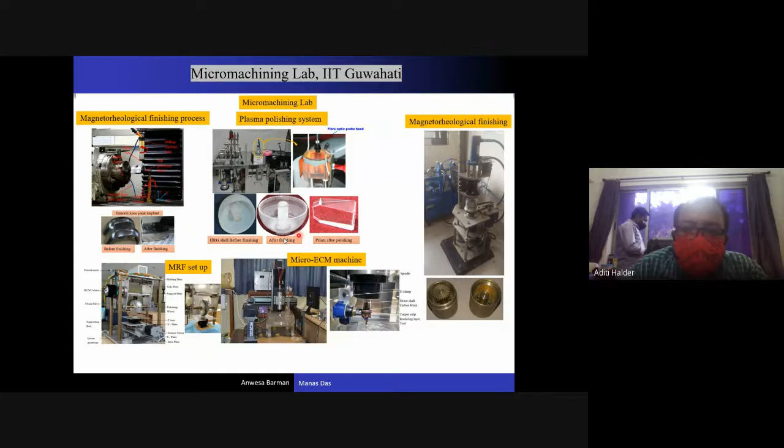Thank you so much, sir, for your lecture and for your time. We have seen that you're busy, sir, all the way. Thank you so much for giving your time. Any questions from the participants?

Whatever experimental setup we have shown here, it is very easy to develop. You can develop your own setup in your institute. If you have a milling machine or a drilling machine, the same machines can be used for doing this kind of experiment.

But the cost escalations are so high, sir. Cost escalation means - what I told you, you have a drilling machine and milling machine already there. What we did is actually just a rotational motion, so you don't need anything special for this MRFF setup. You can use your own drilling machine, but you have to develop the MR fluid. That MR fluid combination is already given in our paper if you search for it. So your old milling machine and drilling machine can be used for this purpose.